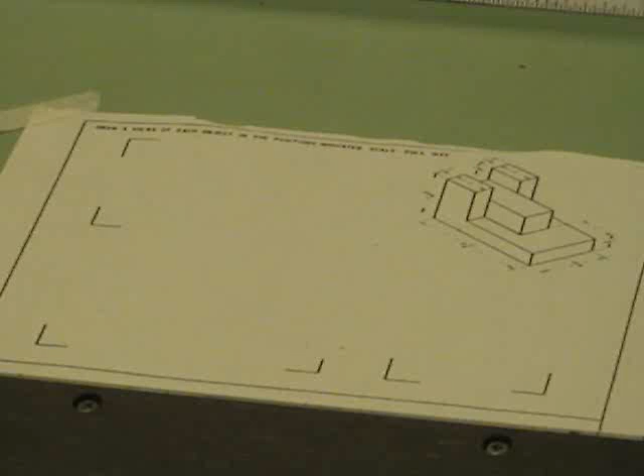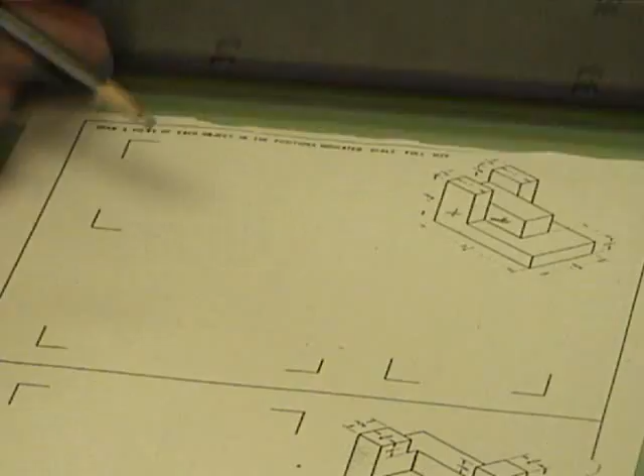Alright, now we're looking at sheet D11. Once again, we're going to be drawing the front view first because it has the most features on it. It says, just like all of them, that it's 3 1/4 wide, 1 3/4 tall. So what are we going to see? We're going to see X and Y are the two things that we're going to see. So let's do that. We're going to measure up 1 3/4.

We'll measure over actually the 3 1/4, the bracket's already there. It says that it's 1 inch over there to get that top part. So I'm going to measure over 1. It says that it's 1/2 of an inch tall on the other side over here. So measure up the 1/2. And then at this point again, all I got to do is connect the two to get the measurements. I don't even need to know any other measurements. I'm just going to connect them. So there's my X part.

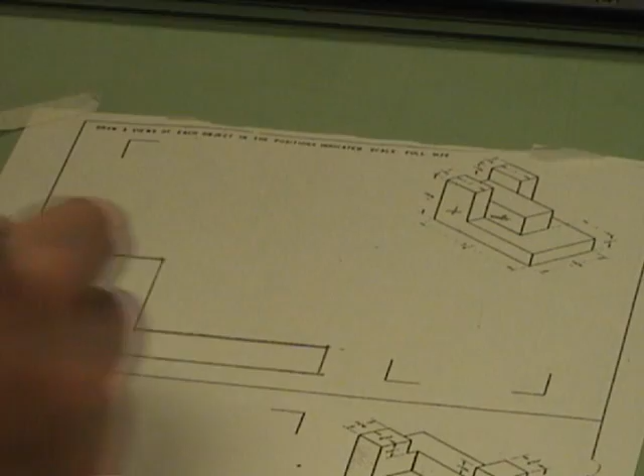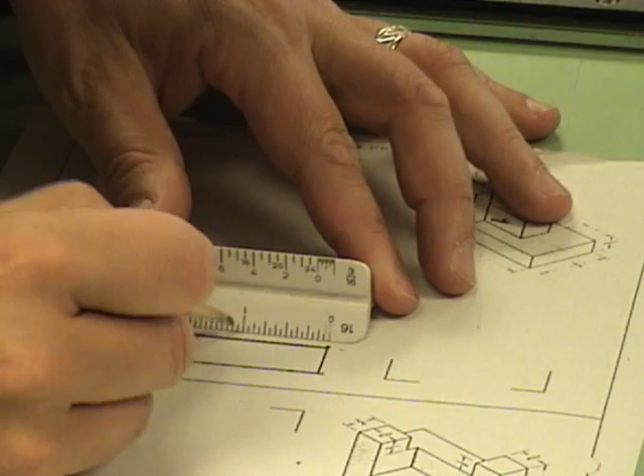Now I need to get this Y little rectangle here. If you look on the drawing, it says that the edge of this piece is 1 inch away, and it says that it's 1/2 of an inch down. So I'm going to measure 1/2 of an inch down, and I'm going to measure 1 inch over, and it's the exact same thing that we did before. All I'm going to do is draw the line over, draw the line up, and that's going to give me my Y. So our front view is almost done.

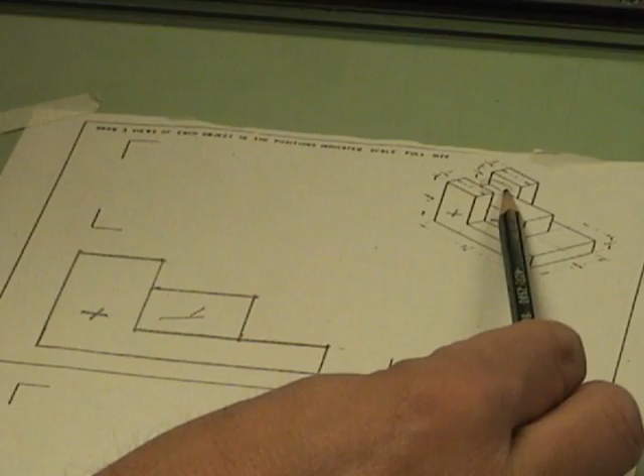Why do I say almost? Because when we look at this piece, is it solid all the way through the part? Or is there a gap in there? There is a gap inside of there. So we got to represent that gap by a hidden line, which means we do got to show this line right here that there is a gap going through the part.

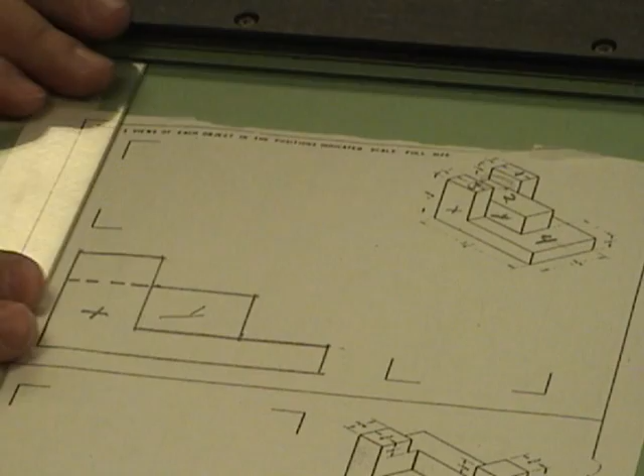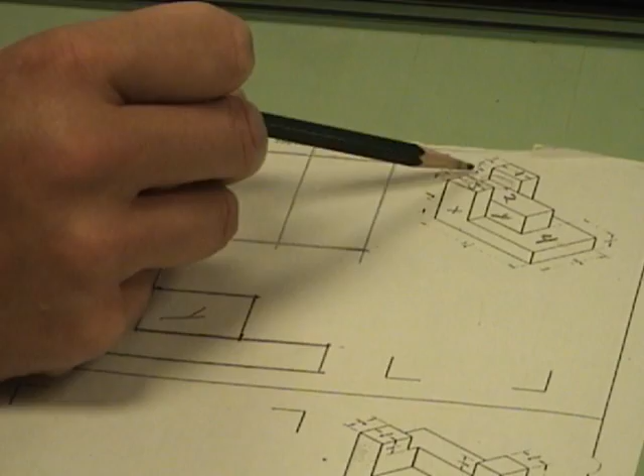When we look down at this piece, we see 1, 2, 3, and then like a sideways C again, 4. So what we're going to do is, just like always, transfer all the up and down lines up. Go ahead and use those brackets that are on the sheet. Certainly isn't what we see. We need to see 4 rectangles. We only see 3 that are a little bit messed up. It says that these are 1/2 of an inch over. So I'm going to measure in a 1/2 each way.

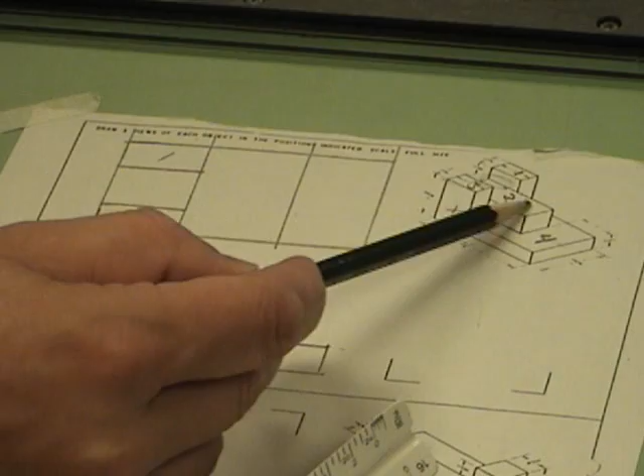That gives me 1 and 3. 2, it says, goes out to this point. 2 is representative of this block coming up right here. So I'm just going to extend these lines out. Got to erase this line on the inside. So there's 2. And then there's my sideways C, but I don't see the C. I got to erase those lines out of there. And there's my C to get the number 4 there. So the top view is now done.

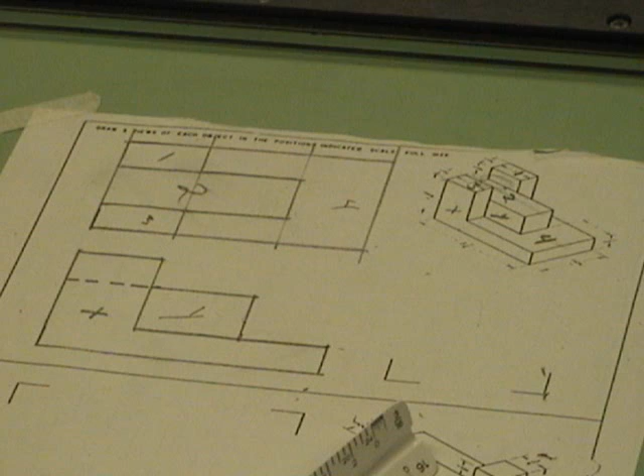Now when I look at it from the right side view, I'm going to see A, B, C, and D. So just like normal, let's transfer all the horizontal lines over. Run these up. Well, there's D. We've got D. We need to see A and C. And we know that those are over 1/2 of an inch again, so we'll just measure over a 1/2. Measure over a 1/2. Bring them down, bring them down.

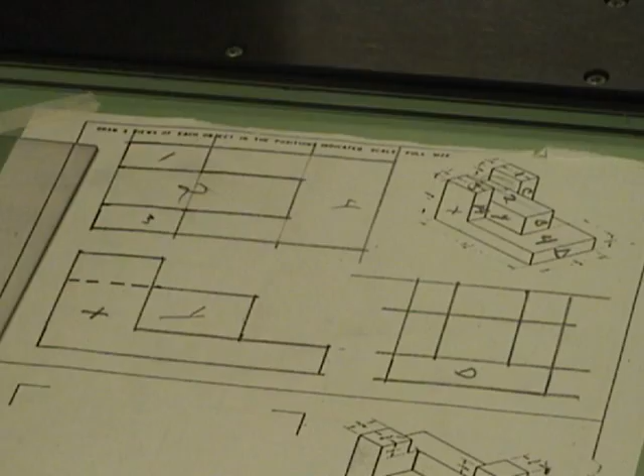Now, we're still not done yet because we got to see the full letter of A. So I'm going to take this one out. There's A. There's C. So we got A and C. Then we have to erase out this part because there's no rectangle up there. So there's my B. So the top one is now finished.

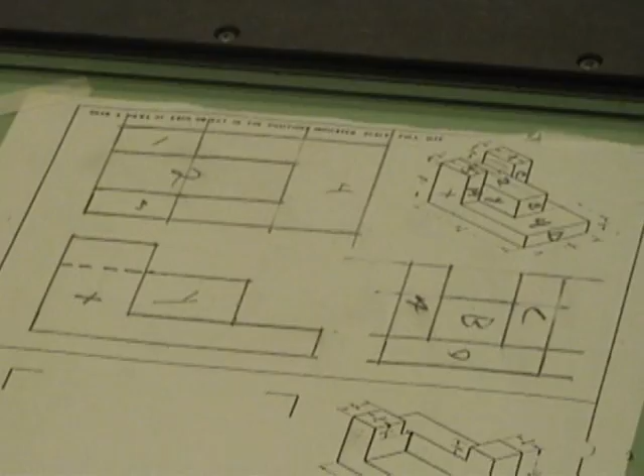So we look down here at the bottom. Once again, we are the same way. We're going to draw that front view first, and we see 2 L's on top of each other. We got an L on top of an L. It is 1 3/4 tall, just like all the other ones that we've done on these sheets so far.

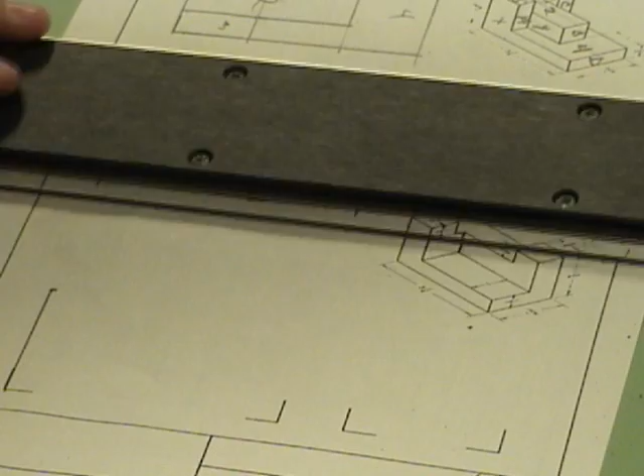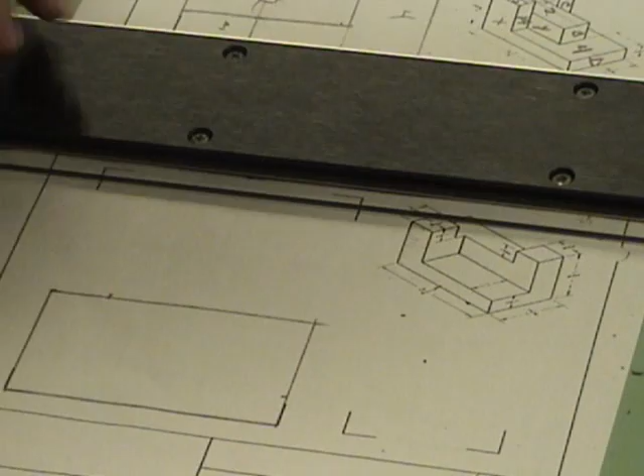Start off by making my overall size of the box. Great. It says that I've got to come over 3/4 of an inch and up 1/2 of an inch to be able to get my first L. So I'll come over my 3/4. I will come up my 1/2. Once again, I've got to connect the two. I don't need to know the length of any of those lines.

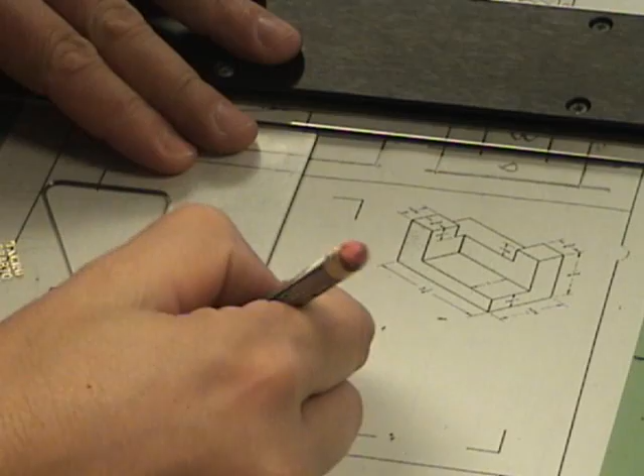So there's one L. And now I've got an L that lays on top of this one. It says it's over 3/4 and down 1/2. So I'm going to come over 3/4. I'll measure down 1/2. Connect them around, and then obviously there's nothing in the middle here, so I have to erase this line out of there. So I've got my two L's laying on top of each other.

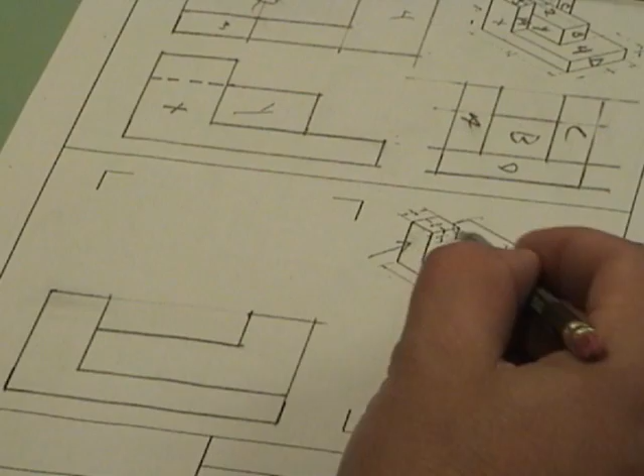Now the question I would ask you is, when you look at this piece here from the front view, is it a solid L all the way through the part, or is there a gap back behind it? There is a gap back behind it, so we're going to have to represent that by a hidden line going through the part. When we look at this one, from the front view this direction, is it solid all the way through the part? Does there need to be a hidden line there? No, because it is solid all the way through the part.

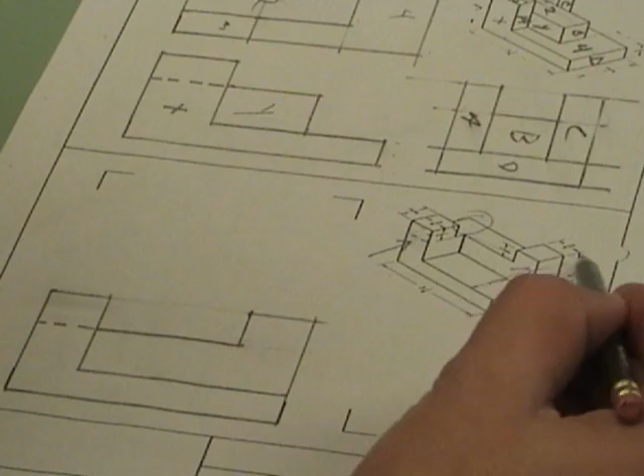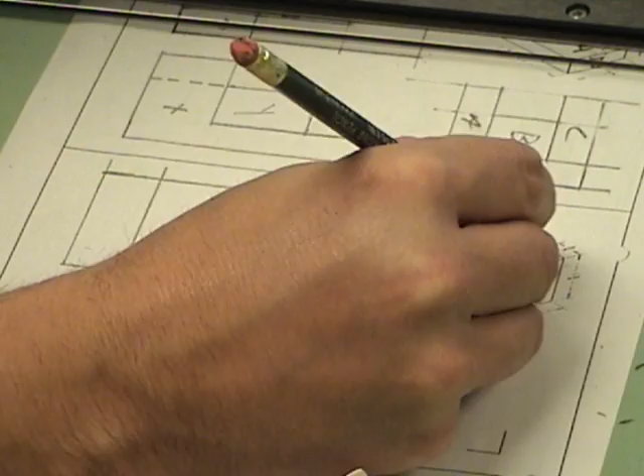So if we go to the top view, let's transfer all the up and down features up. Now this time it doesn't give us the bracket for how thick the part is, which is fine. It's 1 3/4 wide. So let's go ahead and make that measurement. Now what do I see from the top view? I see A, B, and then C, D. So I see 4 things here. Well, this box right here is 3/4 by 3/4. We already got 1 3/4 mark on there, so I'll put the 3/4 here.

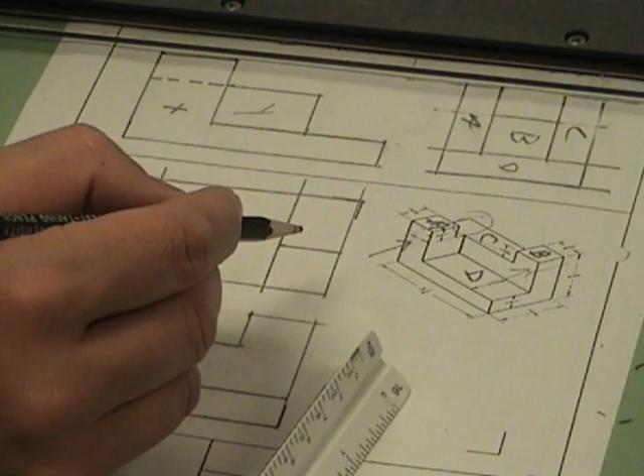This box also just happens to be 3/4 by 3/4, so I'm going to put a 3/4 line box up here. What do I mean by that? I'm going to say there's 3/4, there's 3/4. So there is A. Oh, I flip-flopped that around, didn't I? Needs to be the other way. That's my fault. 3/4 this way and 3/4 down this way. Here's A and here's B.

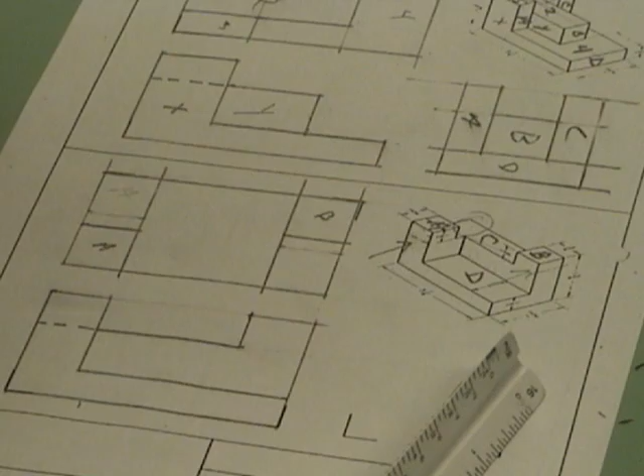Now notice that there's like a little ledge right in here, so I'm going to just go ahead and connect that over. So there's my C right there. And then D is already there. I just got to erase this line out of there. So there's the 4 things that I see: A, B, C, and D.

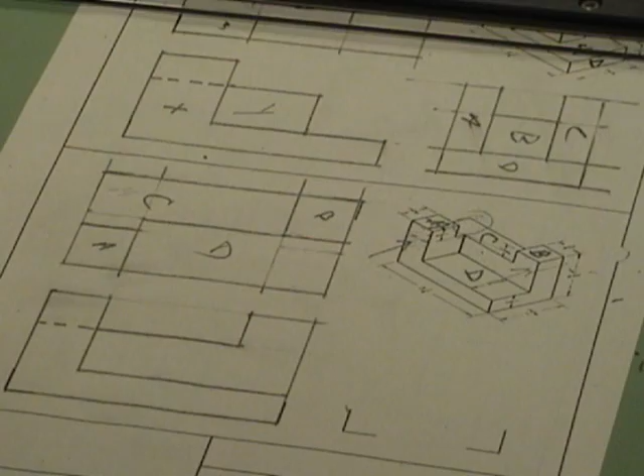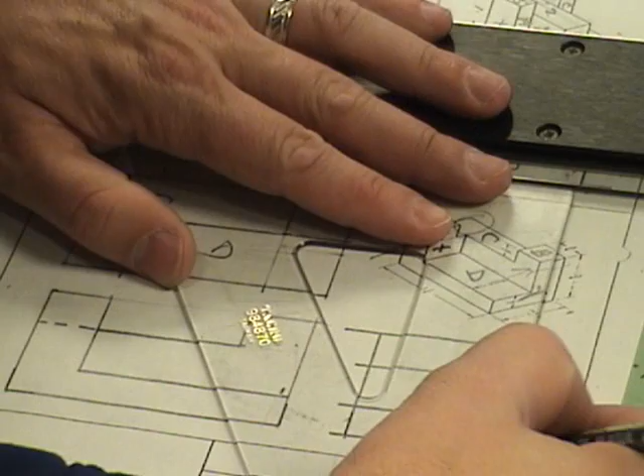When I look at it from the right side view, I'm going to see X and I'm going to see Y. Let's transfer over all the horizontal features again. Go ahead and run them up. That certainly isn't what we see. So let's start off by getting Y right here. We know that it was 3/4 of an inch wide. We also know that this one's 3/4 inch wide, so I'm going to go ahead and make that measurement.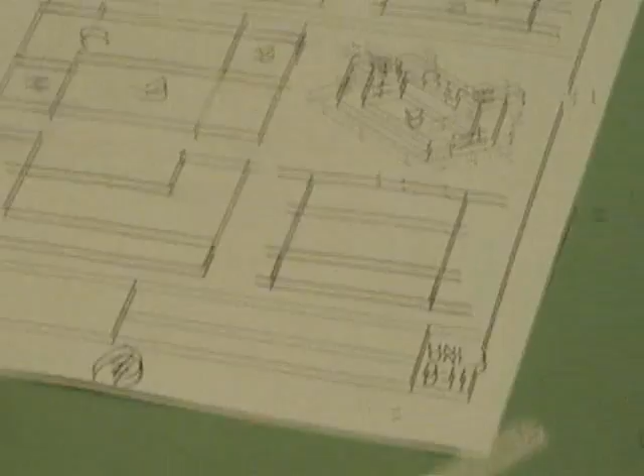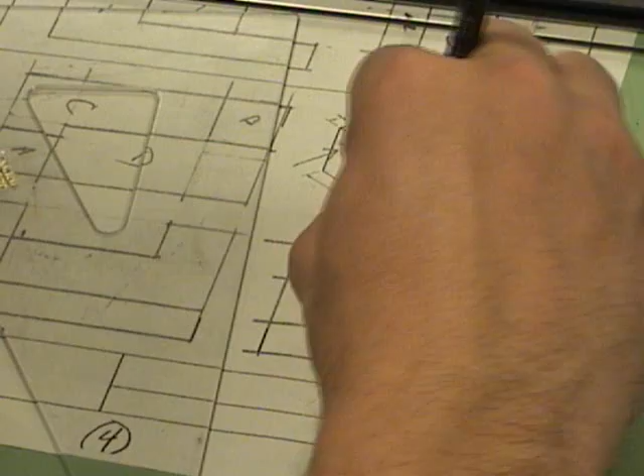Whoops, kicked it. We're going to go ahead and bring this one down at 3/4 and this one down at 3/4. We have a gap inside of there because these two don't line up. When we measure over this 3/4, I could have went all the way down with it. So that gives me here my L, which is Y. And if I erase this one right here, that is X, which is the other part of it.

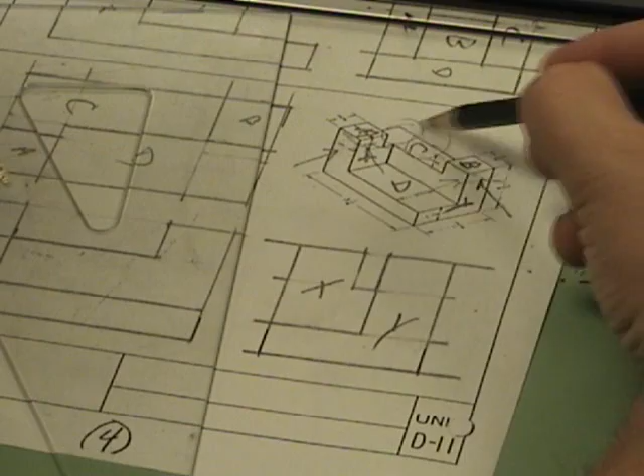Now what I've got to look at is, when I look at this piece here, is it solid all the way through from the right side view? Yes, it's solid all the way through the part. When I look at this piece right here, is it solid all the way through the part? Is there a gap behind it? There is a gap behind it. So what does that mean? You've got to show a hidden line. And that is sheet D11 complete.